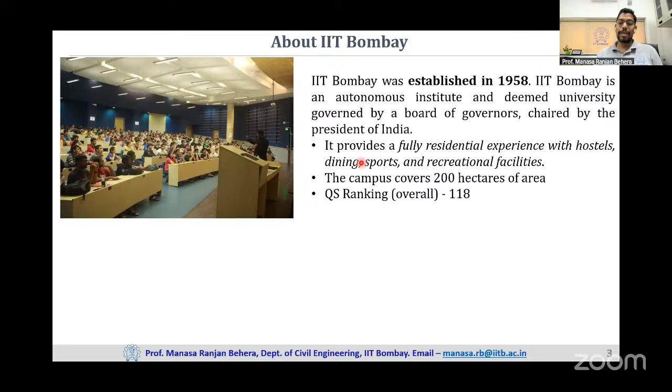First of all, I would welcome you all to IIT Bombay. Whenever you would like to come, we will be happy to host you. IIT Bombay was basically established in 1958, and the Department of Civil Engineering, where this specialization of ocean engineering is there, started along with the institute in 1958. We are actually doing well in terms of world ranking, QS ranking, and we also have various ranks at the country level as well as within the global scenario.

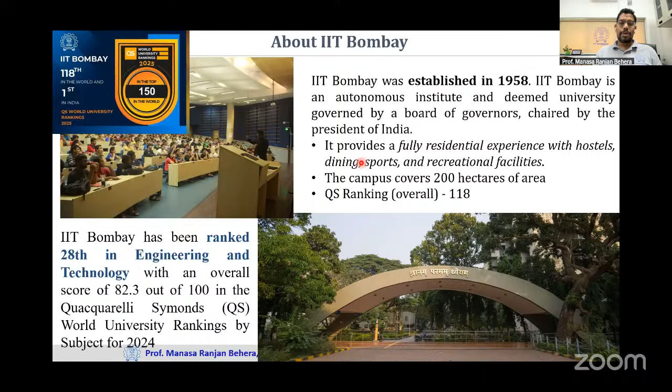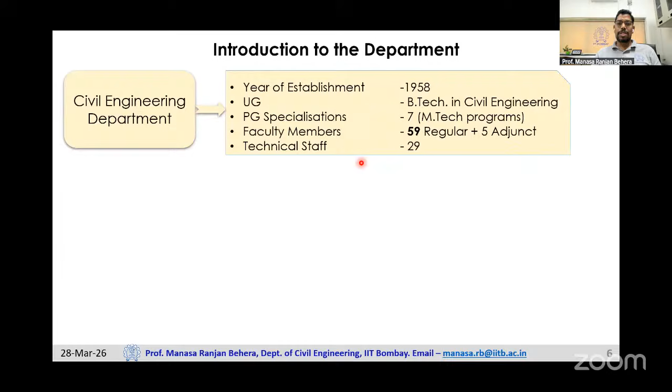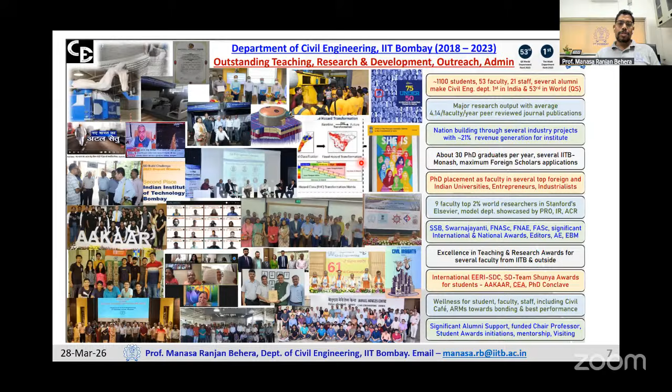This is again our department students, but coming to the department as a whole, we have almost 60 faculty members, and we have 7 specializations or verticals. I will quickly update on these verticals, not spending much time. Our faculty members have been involved in various national as well as international projects, and they have been recognized by various forums in the country as well as globally. The verticals are transportation engineering, geotechnical engineering, water resources engineering, structural engineering, ocean engineering, remote sensing, and construction technology and management.

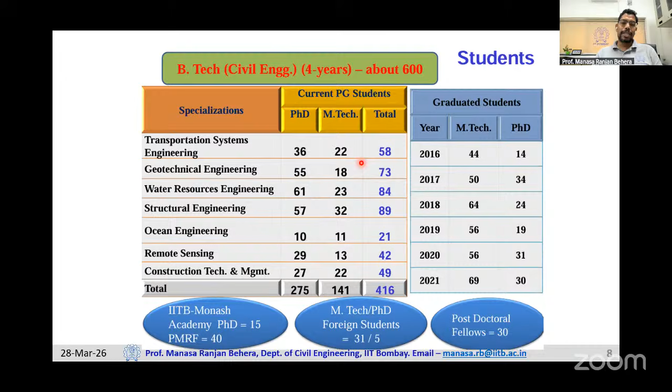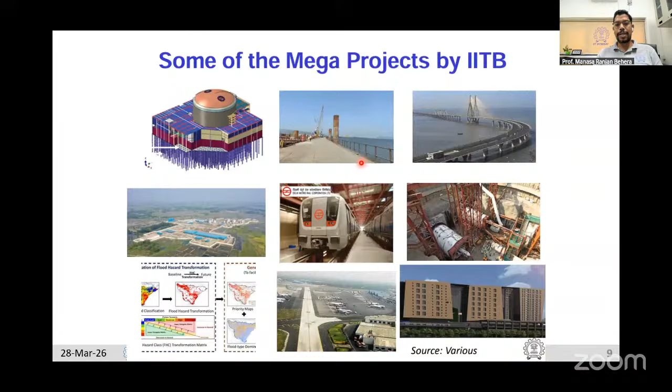Coming to the Ocean Engineering Group, let me introduce the faculty members who are part of this Ocean Engineering Group. We are 5 faculty members. Professor Balaji, who is currently on deputation as Director of NIOT, Ministry of Earth Sciences, is not present at IITB effectively, but he is always part of our colleague faculty, and he is expected back after completing his tenure.

Other than that, the 4 of us are currently here. We are contributing to all the research work and teaching that is happening, and the work that I'm going to present will be a compilation of many of us. However, before that, I would like to highlight some of the different work that we do at IIT Bombay.

In terms of coastal engineering, we do various physical and numerical modeling, coastal and offshore structures design, wave structure interaction studies, tidal hydrodynamics, computational ocean and coastal hydrodynamics, statistical and stochastic analysis, and neural network and soft computing works, which are applications to ocean engineering specialization, and modeling of tides, storms, and tsunamis. That is a major domain that I work in. We also look at impact of climate change, and wave, tide, and wind energy, which is another field where we have been working substantially.

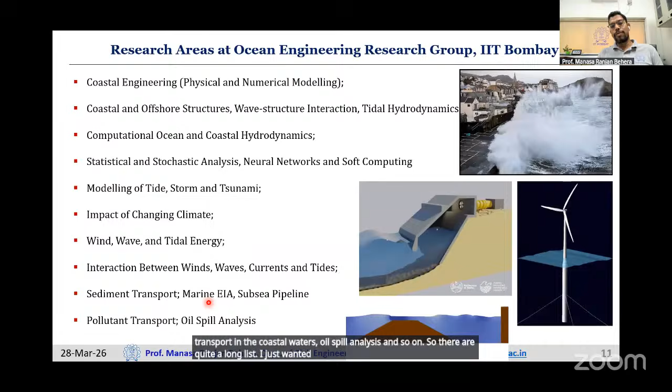So there's quite a long list; I just wanted to give a quick overview. Coming to the facilities that we have, we have a few facilities, unlike what you can possibly expect at IIT Madras, which has quite a large number of facilities in terms of experiments.

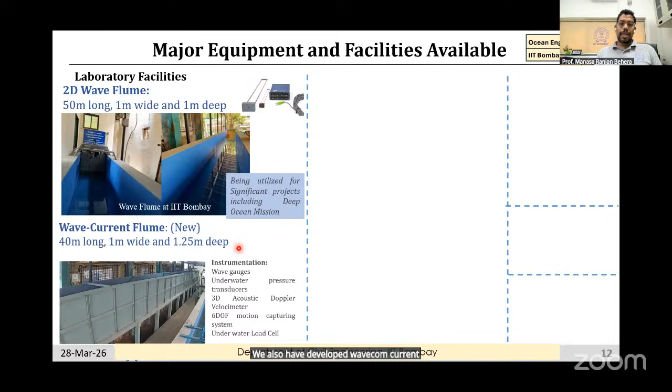We have a wave flume, that's a 2D wave flume. We have also developed a wave cum current flume. In addition, we have completely designed an in-house wave maker system, which is our own, and the copyright has already been obtained and it has been trademarked.

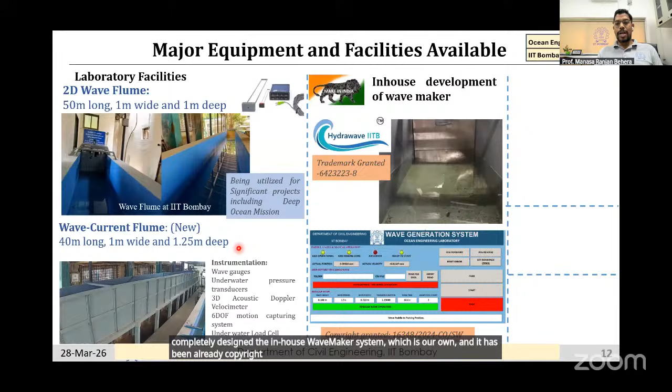In addition, we have recently installed and operated a towing carriage system, which is already working and being used. And to update all participants, we are in the process of developing a wave basin where we will be able to have a larger facility to generate long crested and short crested waves. In addition, we have computational clusters for various ocean modeling and ocean applications.

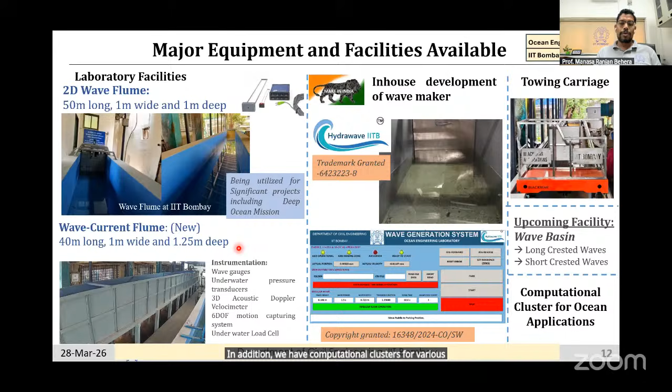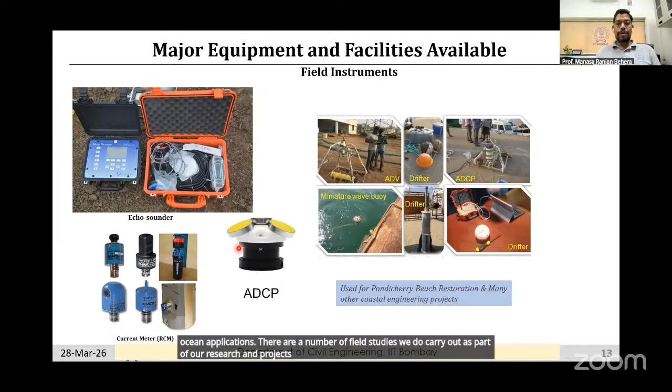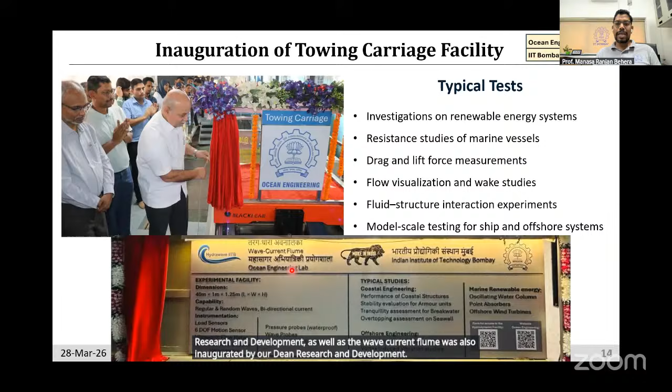There are a number of field studies we carry out as part of our research and projects, so we have several equipment to carry out field studies and field measurements. I want to highlight the recent towing carriage, which was inaugurated by our Dean Research and Development, as well as the wave current flume, which was also inaugurated by our Dean Research and Development. This has many capabilities that we will come to know as we discuss.

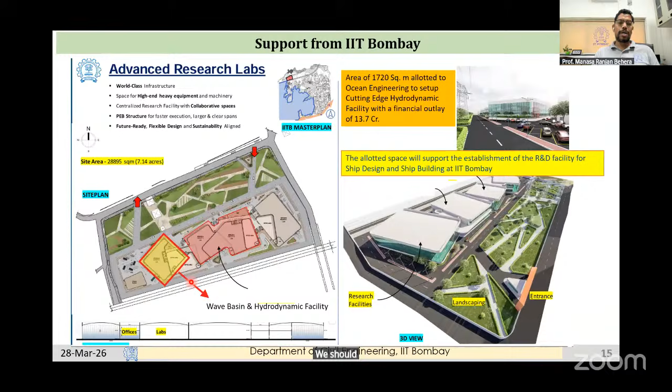As I was mentioning, we are planning to develop a wave basin where the land parcel has already been earmarked and the work is almost about to start. Possibly within a year, we should have this with us and in operation. This is the size of that wave tank and other facilities which are going to come up at that facility.

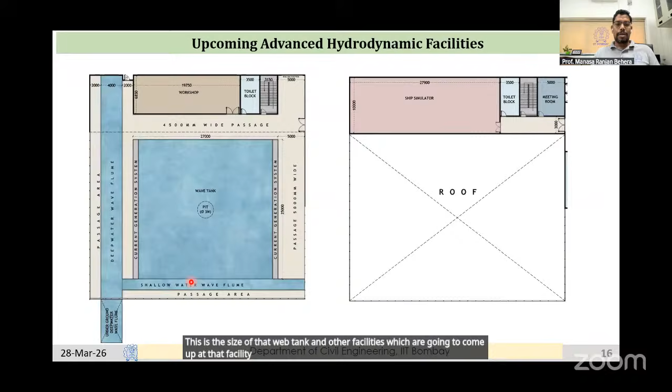Now I would like to highlight some of the research work that we are carrying out at IIT Bombay in different areas. This is on the marine renewable energy sector. We are carrying out studies on offshore wind energy, floating offshore wind turbines, oscillating water columns, OTEC platform analysis, then saline energy from salt water, and point absorber based studies as well. Some of this I will cover in detail today in the talk.

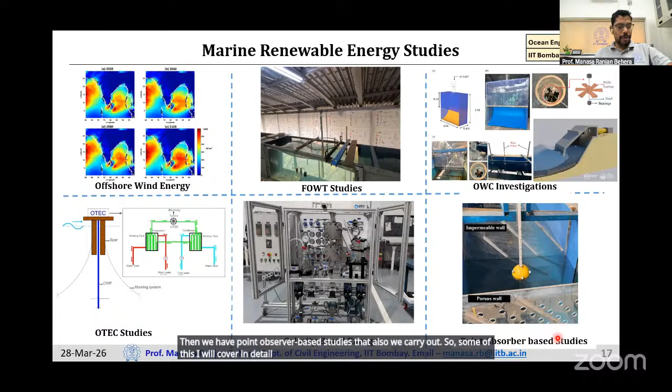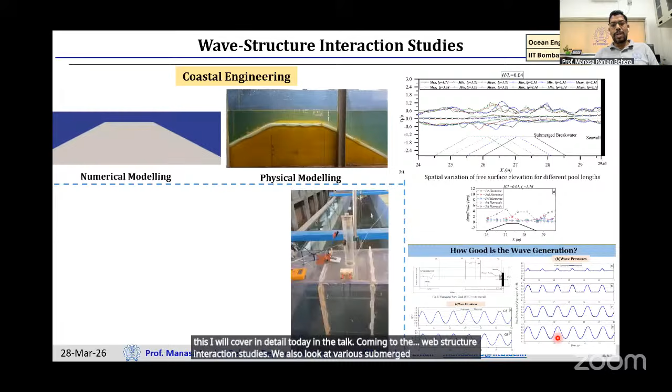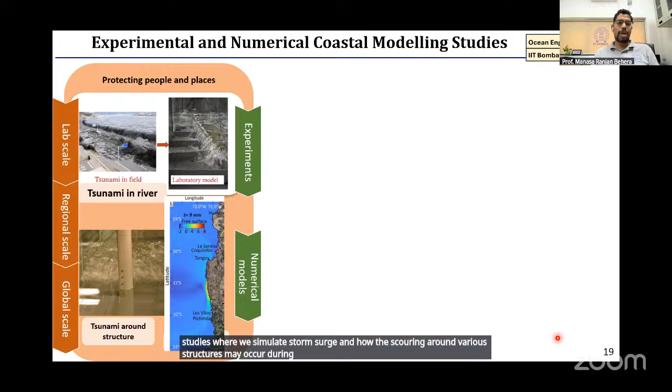Coming to the wave structure interaction studies, we also look at various submerged breakwaters, submerged reef analysis and how they work, and the oscillating water column, how that works. In addition, we carry out experimental and numerical coastal modeling studies where we simulate storm surge and how scouring around various structures may occur due to storm surge or tsunami kind of flows. And in addition, impact of vegetation or nature-based solutions is something we also investigate numerically as well as experimentally.

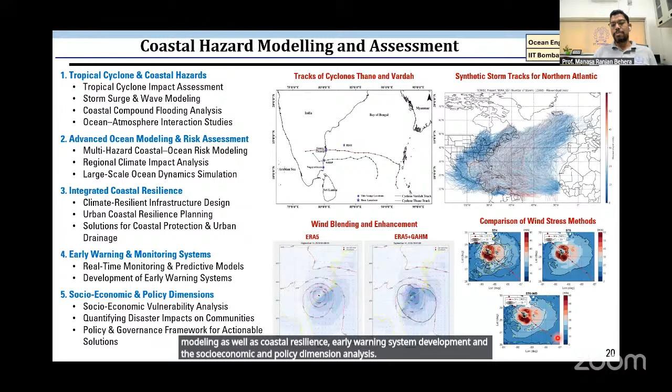Some other types of structures we carry out studies on are floating breakwater and wave energy device analysis in our laboratories. This is another area where we work in terms of assessing and modeling coastal hazards in terms of cyclone modeling, storm surge modeling, as well as tsunami modeling and flooding. We carry out work towards modeling as well as coastal resilience, early warning system development, and the socio-economic and policy dimension analysis of these disasters. This is again not going to stop at that.

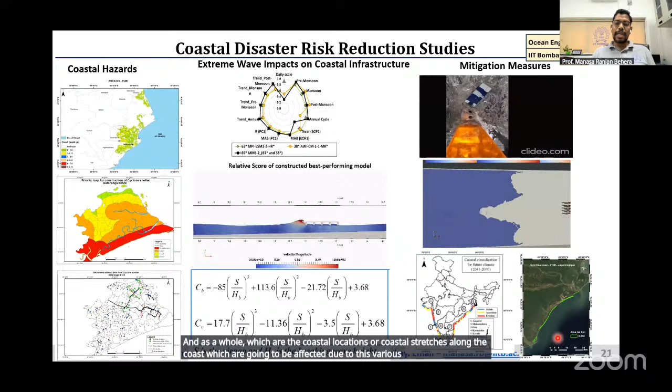We also look at various coastal disaster risk reduction analysis, how we can safeguard the public who are going to be affected, the structures which are getting affected, the design parameters which need to be considered for such structures, and as a whole, which coastal locations or stretches are going to be affected due to these coastal hazards as well as climate change impact.

Having said that, we have recently signed several MOUs with the government of Maharashtra to develop R&D infrastructure, to institute a center of excellence for the growing field of ship design and shipbuilding. We are also planning to offer a postgraduate diploma program for working professionals who can register for this course and complete it to enhance their profile as well as their knowledge.

This PGD program will be on coastal infrastructure and coastal ship design, ship repair facilities.

Now let me come to the technical talk.

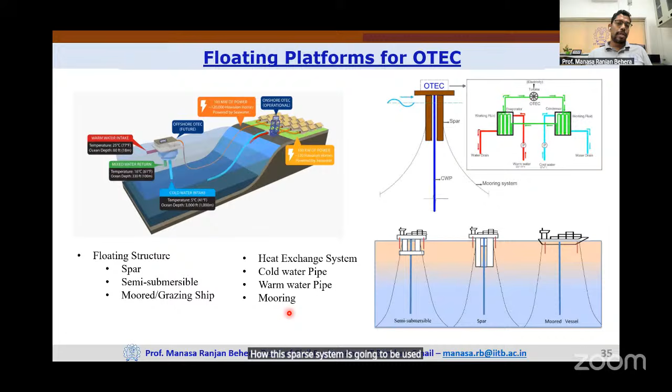Having explained that, we know there are many floating structures, starting from spar, semi-submersible, and vessels or ships. What are the processes involved? There's the heat exchange system, the cold water pipe is going to pull water, the warm water pipe is going to pull warm water, and then you will have mooring lines. All these have to be taken into account when we design and analyze this. So in our study, we have taken a spar, and looked at how this spar system can be applied for this OTEC system.

I'll not spend time on this, as these are already known to many of you, since you are all from naval architecture background.

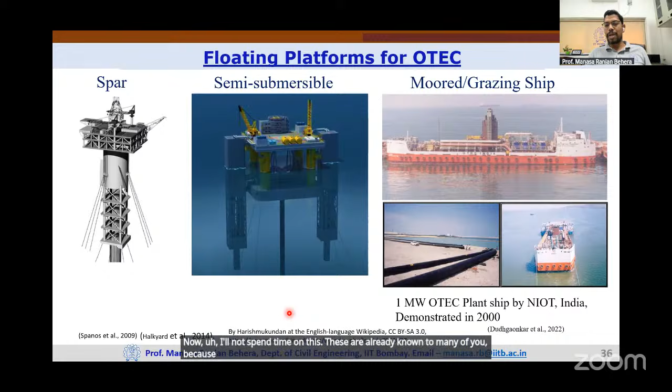Going forward, what we did first was look at all the tools that are available. Yes, we know we will carry out experiments, but we also wanted to do numerical studies. So we first checked what numerical tools are available that we can use. There were a number of tools available, and we could see that we may be able to use ANSYS AQWA for most of these studies we wanted to carry out, so we decided to go for that. We also looked at various studies which used these softwares, what were the limitations in their use, and what were the advantages.

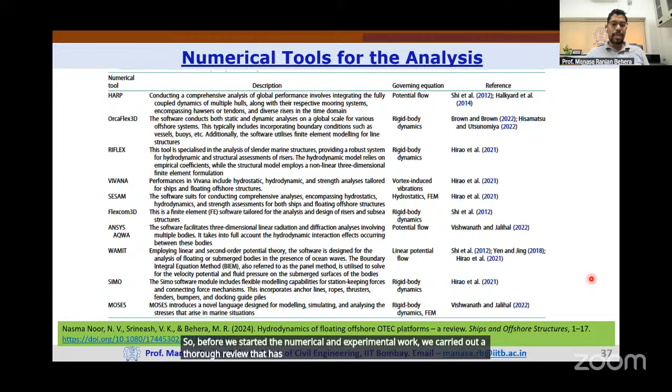More details on this can be found in the publication shown at the bottom, which is a detailed review of this work. So before we started the numerical and experimental work, we carried out a thorough review that has been published, so it can be accessed. Now moving to the overall analysis and design we wanted to carry out for this floating OTEC platform, we wanted to understand what the loads are.

There are several design loads. If you look at them, you have first of all structural loads, then extreme loads, then environmental loads and operational loads. When you talk about structural loads, it is quite simple to find out. You can have dead load, live load, thermal loads, and the weight of water that is going to be brought to the structure.

The VIV is actually a kind of hydrodynamic load, but we are putting it under this because of the cold water pipe. It is going to be acting on this overall structure, and as the water is being pulled or taken to the deck from the deeper water, there is a flow velocity. That velocity is going to have some additional inertia impact, and then you will have fatigue loads as well. So all that acting on the cold water pipe will also be acting on the overall structure. Then you will have the mooring load.

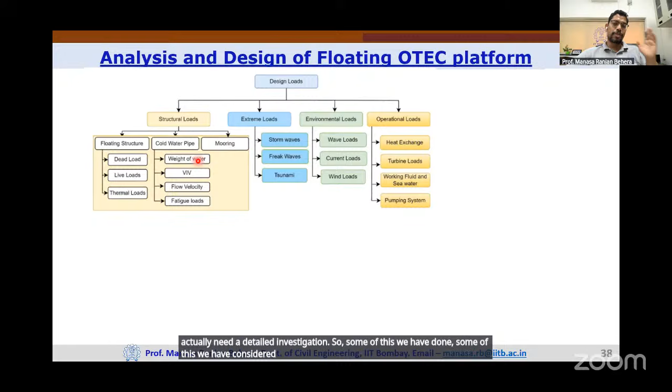So now, although it is very simple to write this, individually they actually need a detailed investigation. So some of this we have done, some of this we have considered based on previous work and previous structures, and we have progressed with our work.

Now, for extreme loads, one has to consider storm waves, freak waves, and tsunami. These are obviously expected in the ocean, so one has to really take into account the loads and impacts due to these extreme events.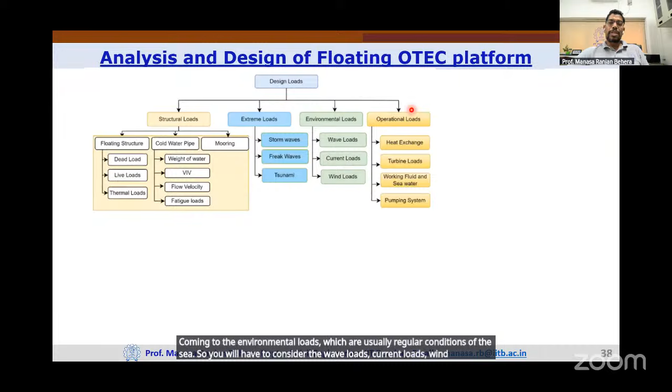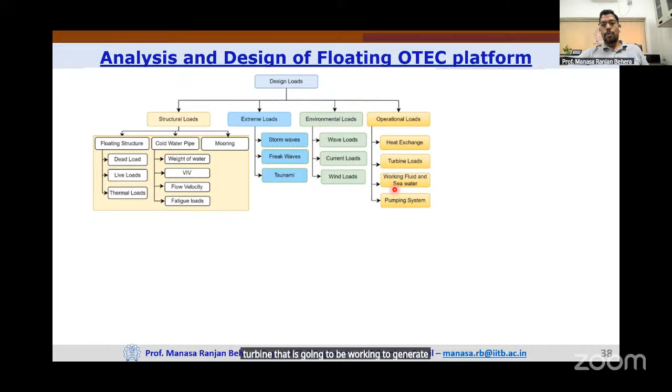Coming to environmental loads, which are usual regular conditions of the sea, you will have to consider wave loads, current loads, wind loads, and operational loads. These are basically the operation of the OTEC platform, that is the operation of the heat exchanger, turbine working to generate power, and the working fluid. Basically, some other fluid is used for vaporization and operation of the turbine, so that fluid is also going to play some role.

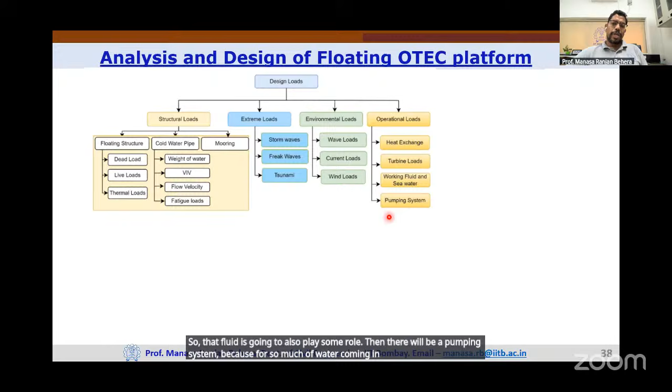Then there will be a pumping system, because for so much water coming in and out, we need a huge pumping system, and their operations are also going to affect the structure. So all these loads have to be considered when we carry out this study.

Now, what we need to do is carry out the offshore floating structure study. After incorporating all this, we'll have to do the response analysis, and then we'll finally decide whether it can be taken for energy applications or not.

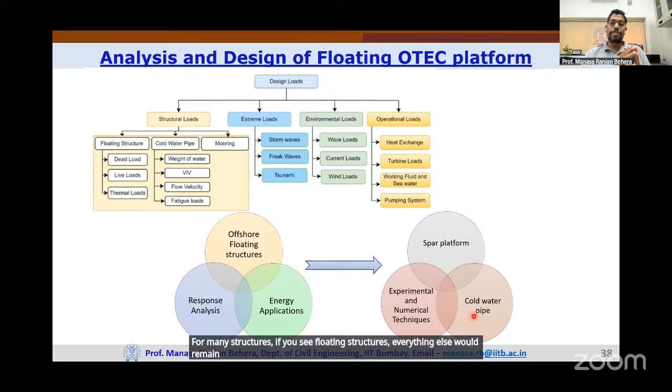Now, for the floating structure, we have considered the SPAR platform. For response analysis, we have carried out experimental and numerical studies. Finally, we also focused on the cold water pipe, because for many floating structures, everything else would remain the same except this cold water pipe and its dynamics. So that needs more focus and more study, which is what we have checked in our research.

So there are research gaps which we have listed here from this basic analysis. First, we need a comparison of spar, semi-submersible, and vessel as OTEC supporting structure—finally we ended up with spar. Then the effect of flow of the CWP on the response behavior has to be understood.

Then we need to carry out coupled numerical model studies to represent the reliable actual physical behavior of the structure, and optimization of the cold water pipe for energy efficiency. So what diameter of the pipe is going to be useful for extracting enough fluid and enough water, while ensuring it does not adversely affect the structural dynamics.

Then we have to look at the intricate interplay of the moon pool, which is going to take the cold water pipe and warm water pipe down, and the CWP as a whole, on the platform motions. Finally, overall, we will look at the behavior of different OTEC floating structures in various conditions—random waves, extreme environments, and so on.

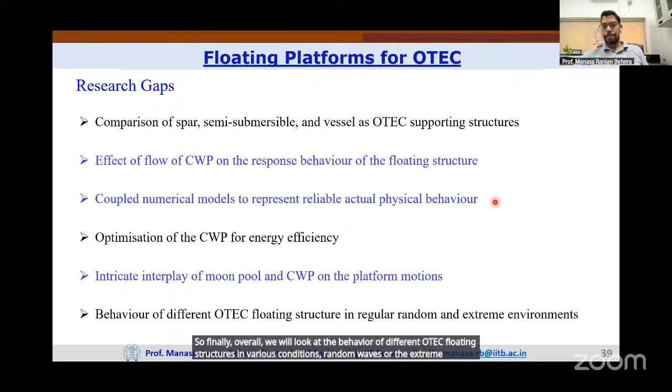Now, coming to the study, this is something I want to highlight in a nutshell. We actually fabricated the models. We did basic tests starting from the suspension test, bifilar test, and then we tested everything, making sure it was completely waterproof.

Again, just to highlight, this model you see here was actually fabricated in our lab. It's a 3D printed model, and the 3D printer is also in our lab, where it was printed in parts depending on the maximum printable dimensions, and then assembled. While assembling, we had to ensure it was completely proof against any leakage or water ingression inside, so that we could carry out the test properly.

And here you can see it is moving under the waves. This motion—yeah, that's okay. As you can see, there is an accelerometer attached at the top, which measures the motions, and there are other equipment attached inside which give us all the scenarios, and those results are going to be analyzed for further understanding.

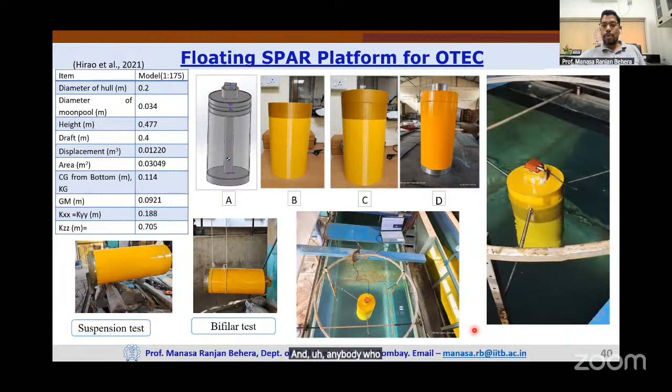There are research papers available, and based on that we have applied it and tested it, which worked well. Anybody who wants more details can contact us, and we will be able to help.

After we did the experiments, we also carried out numerical studies, and you can see the comparison of experiments and numerical studies. Both show quite good agreement with each other, although there are some differences which are bound to happen, and we know why these differences are there.

As I mentioned, the mooring system is not exactly replicated, and similarly there are other things which contribute to these differences.

We found that for various wave heights or significant wave heights, what will be our response or RAOs for different parameters - response RAO for surge, RAO for heave, and pitch - that were obtained.

Finally, these results, as you can see, we have communicated to a journal, and it is still under review. We have got one round of review, but we are waiting for the final outcome.

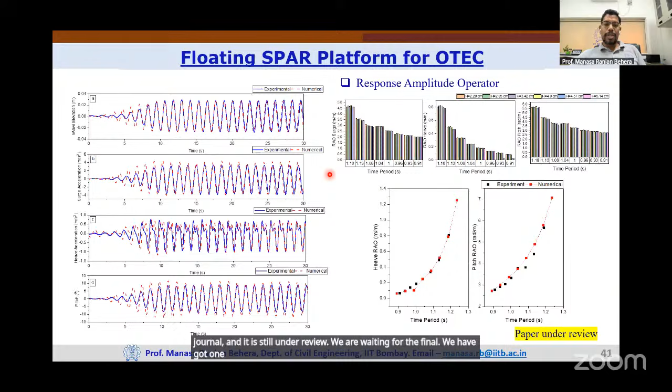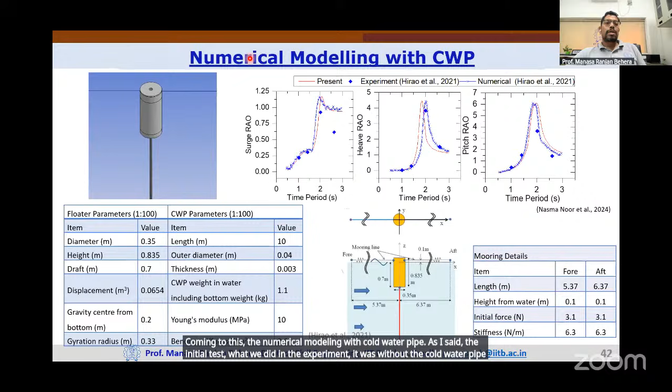Coming to this, the numerical modeling with cold water pipe. As I said, the initial test we did in the experiment was without the cold water pipe. Without the cold water pipe, the impact of the cold water pipe can completely change the dynamics.

To do that, our wave flume was not capable enough to accommodate the cold water pipe, because if the cold water pipe is too long, at 1000-meter depth, even when we scale down, it is still much higher than what we can accommodate in our wave flume.

So we started working on the numerical model. We could implement that, and we did the tests and compared our present results with all the experiments that were carried out in some studies, and we found they're really okay.

Further, during this period, we also found there is a possibility of doing the experiments. So what we did - for this total mass, we thought we could have some length of cold water pipe and then add some mass, and that can be simulated.

However, what we are missing out here is the flow dynamics, because the length, the flow and the vibration is going to be completely different when we have the complete length versus when we truncate it. Even though the mass part is reproduced, the flow part and the dynamics due to the flow are not completely reproduced in the experiment.

I will show you that towards the end, but I just wanted to highlight what challenges we are facing. So we did the numerical modeling, and with that we got results which are quite satisfactory.

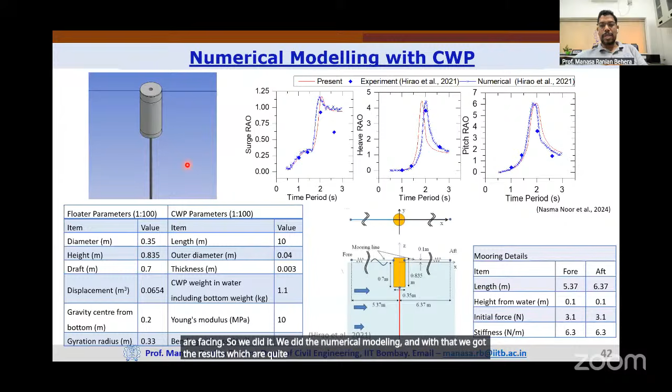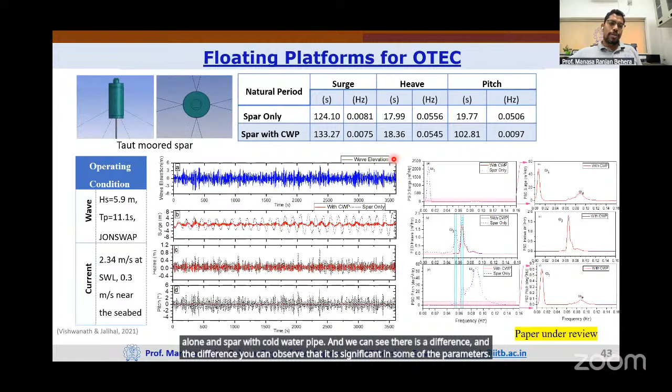The results also showed us how different parameters - surge, heave, and pitch - vary with spar alone versus spar with cold water pipe. We can see there is a difference, and the difference is significant in some of the parameters. I will show you in another plot.

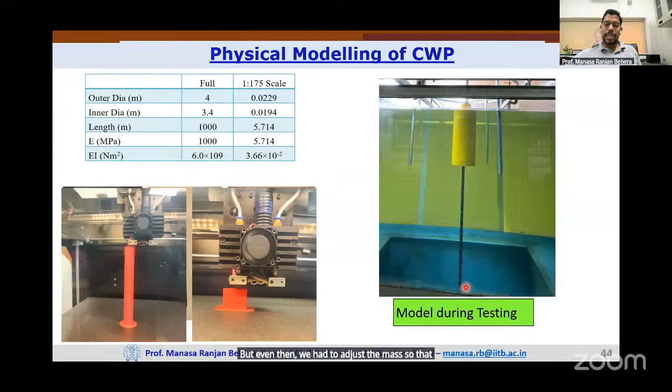This is the test setup with cold water pipe. We have a pit here, and within that pit, you can see the cold water pipe going down. But even then, we had to adjust the mass so it can be represented for the whole length.

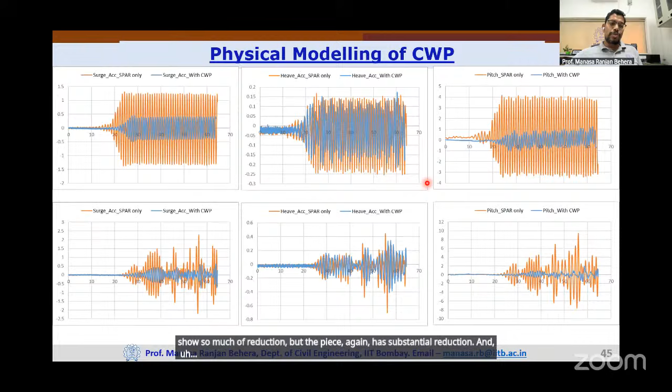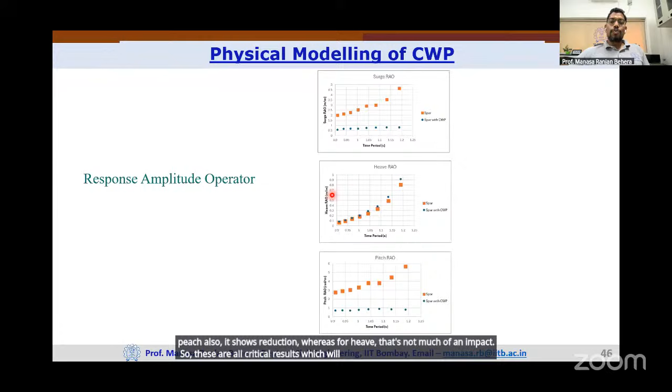When we plotted the RAOs, we can clearly see that the RAO for surge with cold water pipe shows substantial reduction in its motions, and for pitch also it shows reduction, whereas for heave that's not much of an impact. These are all critical results which will help us fine-tune various design parameters of the structure.

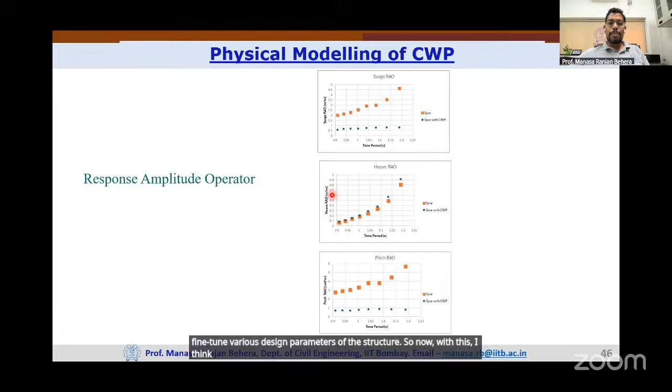So now with this, I think I will move on to the next topic I want to talk about quickly, that is floating offshore wind turbine. So far what we discussed is the floating OTEC platform. Now I am going to talk about floating offshore wind turbine.

This is something we started working on a few years before. One of our students, Arya, who was working has completed almost all the work and will be submitting her thesis very soon. I'm actually presenting her work. The previous work was of another student, Nasma, who also worked on that.

So this floating offshore wind turbine, our aim was to fine tune it for the Indian context. As we know, two regions have been identified and looked at to develop and install offshore wind turbines: one is Gujarat, another is Tamil Nadu.

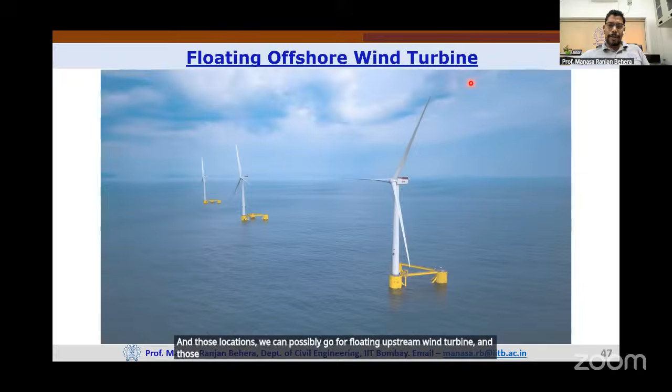These two locations are potential regions for offshore wind turbines. Now, off Gujarat, the depth is available at certain locations, and similarly off Tamil Nadu also at some locations we have substantial depth. Those locations we can possibly go for floating offshore wind turbine, and those studies are essential.

So what we did, we looked at this analysis, and first we took a model called OC3 SPAR platform to support this wind turbine. The OC3 SPAR platform is already kind of available, an established platform which has been studied enough. First we wanted to carry out the experimental investigation of the dynamic characteristics of this platform under the influence of aerodynamic loading.

That is the additional component here. The OC3 platform is there, the SPAR which is present, but it has not been used for the wind turbine. If we want to use such a platform for a wind turbine, we need to account for the aerodynamic loading, the thrust, the vibrations, and the dynamics that come due to the movement of the turbines, the loading on the wind turbine, and its impact on the hydrodynamic stability and so on. For this, we carried out the tests or experiments using this methodology.

I will not get into the steps of this, possibly these are all standard process, but we carried out the tests for regular wave conditions with rotor thrust and irregular wave conditions with rotor thrust, and all that we analyzed and understood, what are the various motion responses that are coming because of this.

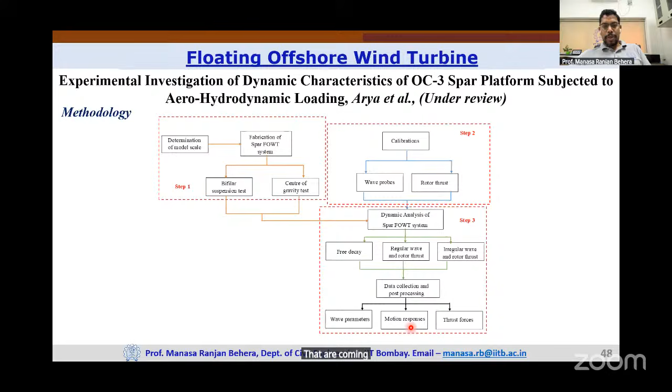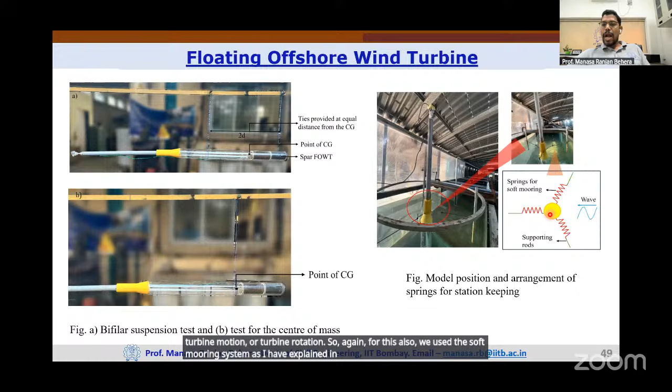So for that, you can see here the experiments which were carried out, the motions of this structure, and if you look carefully you can also see the movement of the turbine. The fan is rotating, which will also give thrust to the overall structure. How this motion and behavior of the spar is happening was studied, and what actions we can take to reduce the motions or stabilize it, and which can be implementable. That's the objective of this study.

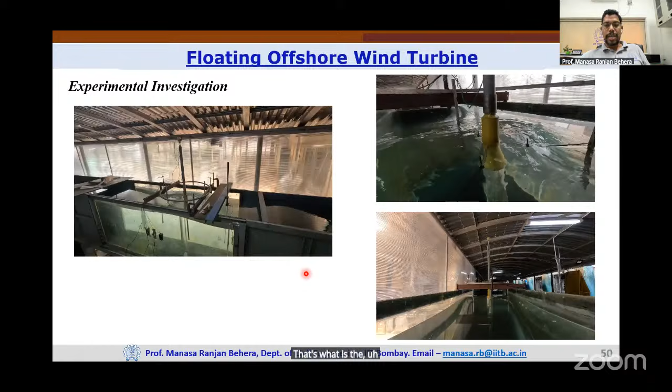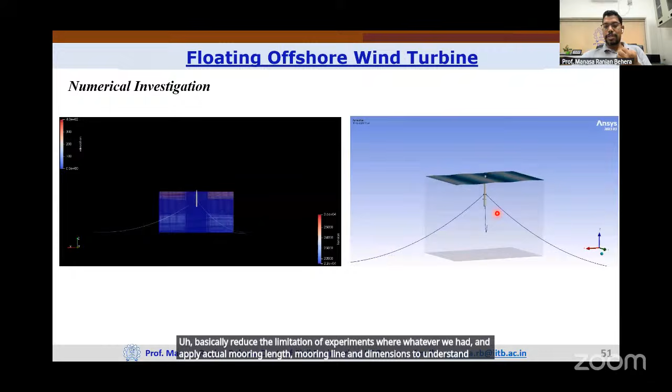So that's the advantage of numerical modeling, which is basically a limitation in terms of experiment. Initially we did the experiment and got initial results that were satisfactory. Then we went on to reduce the limitation of experiments, whatever we had, and apply actual mooring length, mooring line, and dimensions to understand the structural dynamics.

Having done that, we also carried out the study for the coupled wind wave simulation and LCOE analysis. So first we did the coupled wind wave simulation, to understand when there is wind, there is rotor thrust and there is movement, how this is happening. And LCOE is basically the levelized cost of energy.

That analysis is also very important, because if we do not have the cost for unit energy, and that cost is not viable or affordable, then this structure or the turbine is not going to come up, because no investor is going to come forward. So we did that analysis as well.

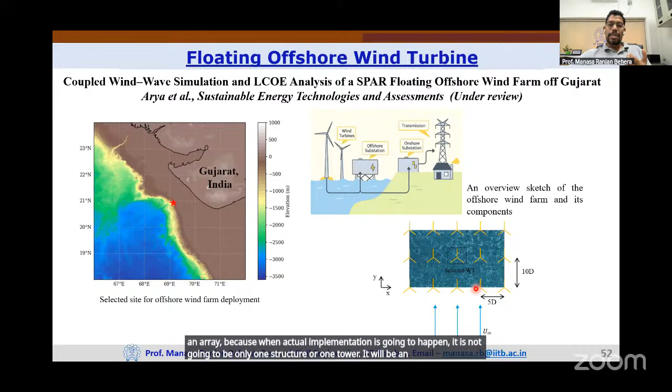In this, what we did, we considered an array, because when actual implementation is going to happen, it is not going to be only one structure or one tower. It will be an array of devices, so you will have number of wind turbines installed in some kind of pattern. That pattern is also optimizable, depending on the wind and the energy efficiency and so on.

Let us not get into that. What we have done is some broad consideration: we have considered 10 diameter, 10 times the d of the rotor diameter. So if you have the diameter of the turbine as d, then the distance between one turbine to the next turbine is 10d, and similarly in the lateral direction we have considered 5d.

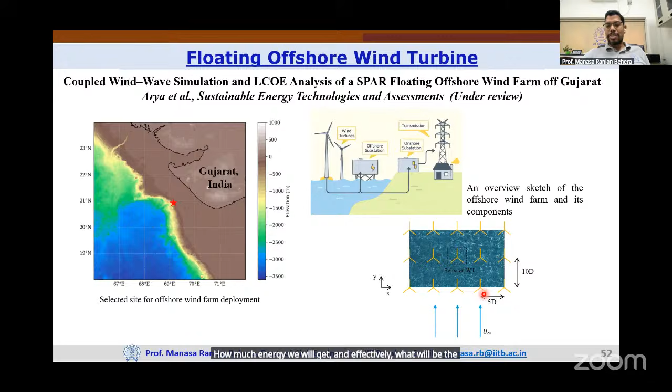Using this specification, we have considered an array, and that has been used to calculate how much energy we will get and effectively what will be the overall levelized cost. Based on that, there are two different methods which we found, and we took both methods to find out what value we could obtain. One is by Maienza, and one is Diaz and Soares, and both these methods we have adopted and checked.

Using that, finally we could see that the levelized cost is coming to something around 9 rupees or so per unit, per kilowatt hour. So that is slightly higher compared to what is the energy cost right now.

But it is good for me to talk at this point of time when we are having difficulty in getting oil and gas, and the news is going haywire, telling that gas is not going to be available, oil is not going to be available, and so on. It is also important for us to see what are the alternatives. So this is what is the alternative. Even though the cost is slightly higher, that might still become equal if this scarcity is going to come up. Now, the question is, let us not accept that this problem will persist.

Even then, if we actually scale it up and increase the number of towers and facilities, there are also studies going on to invest in hybrid energy extraction systems. So it's not only wind. Wherever the wind is high, it is known that the waves are also possibly going to be higher. So if the waves are higher, we can also have wind and wave energy combined, or some locations there could be wind and tide energy together. In case of Gujarat, that also is possible. So we will have to explore what kind of combination of energy we can actually harvest.

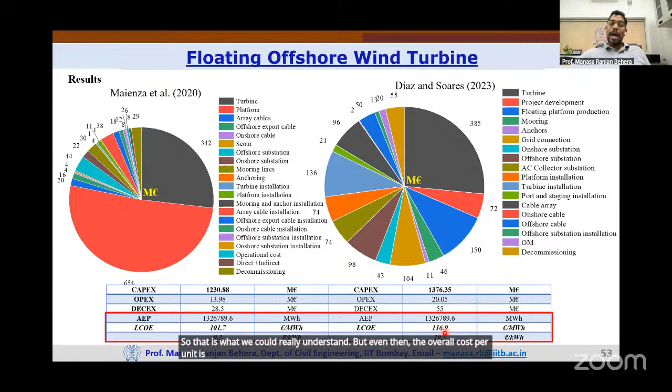So together it might become more cost effective. That is what we could really understand. But even then, the overall cost per unit is still in the acceptable range.

Now, as I said, we have two locations which have been earmarked or identified as potential regions: Gujarat and Tamil Nadu. There are locations along Tamil Nadu and Gujarat where the water depth is very shallow, and in such regions it is possible to go for fixed structures instead of floating. Whenever the depth is higher, in order to reduce the capital cost, we need to go for floating structures, because you cannot go for fixed structure for a very large depth. So for fixed structure, we are also again working, but I'm not going to present the work on that.

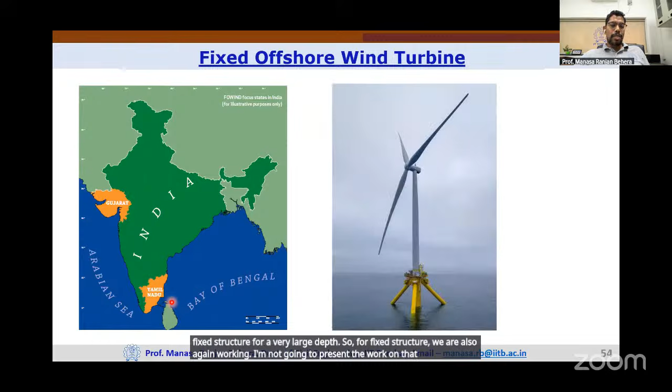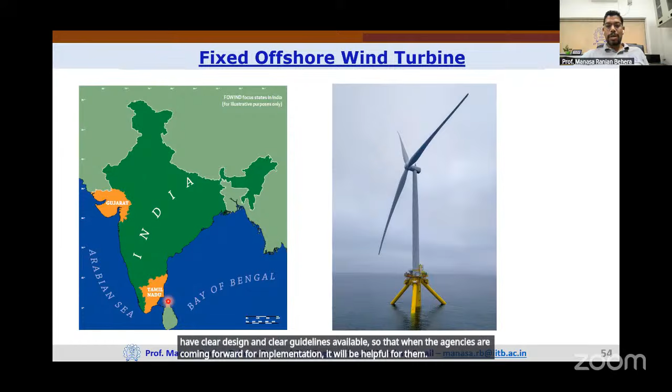There are certain aspects which we want to look at considering the Indian context and investigate, and then make sure that we have clear design and clear guidelines available, so that when the agencies are coming forward for implementation, it will be helpful for them. So that study is going on, and we are carrying out. Another PhD has started working on that.

Now, when I have been talking about these two aspects, these are all offshore installations. Any offshore installation, we have to really check the survival condition. Especially when you have extreme events like cyclones and storms, these facilities are not going to be removed and kept somewhere else. They will be there. So when you know that it will be there, they have to survive.

So that survival condition needs to be checked. So for that, what is the procedure? Procedure is, first of all, we have to understand what are the historical cyclone records or tsunami records, whatever has happened earlier. We need to assimilate that. Once we have that, I'm presenting for a cyclone case, let us say. So for the cyclone, we can get the records from our e-atlas from IMD and get the data. There are also other options like JTWC and other records can be obtained.

From that, one can calculate the probable maximum tropical cyclone parameters. What are these parameters? These are nothing but the maximum wind speed during the cyclone and maximum radius of the cyclone. So basically it gives us the intensity and the size of the cyclone. This probable maximum is a statistical calculation which needs to be carried out, and I'm not going to go through that because it will take a lot of time. I'll also show you some papers from where one can actually get it. We have already published it.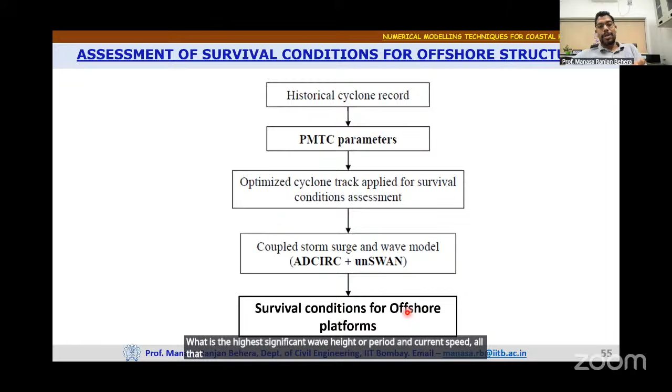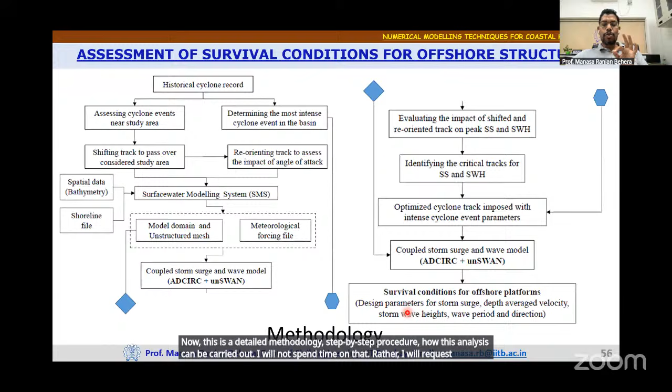And the final output will give us the value that we have to use for survival condition of this offshore platform - what is the highest significant wave height, period, and current speed - all that we will be able to obtain. Now, this is a detailed methodology, step-by-step procedure how this analysis can be carried out. I will not spend time on that. Rather, I will request you please go through our papers so that you will get the detailed methodology.

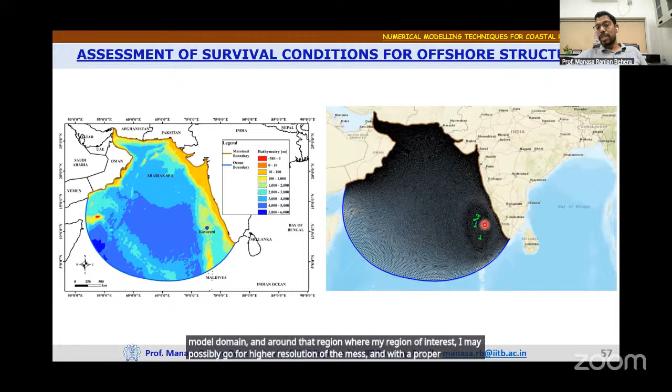Now, this typical domain I am showing here is for the Arabian Sea. You can see here, this completely captures the Arabian Sea domain. And here, let us say I have some installation in this island where we have Kavaratti in Lakshadweep, and I want to study that. Then what I will do is first discretize this model domain, and around that region where my region of interest is, I may go for higher resolution of the mesh with a proper fine resolution discretization to get a better result. So these things have to be done.

We have done it, and then we considered some of the cyclones that have happened earlier. So some cyclones that we could identify were considered. But the first thing we think is that if the cyclone passes through that site, then we will get maximum load.

So that one has to carry out, possibly if we don't know. Then after doing that, we understood that we are not getting the maximum surge at the site if the cyclone is passing through directly, because the cyclone is always anticlockwise and the maximum velocity is at the distance of R max, wherever that is. So if we move the cyclone slightly off and simulate it, the maximum radius and maximum velocity might hit this location, and that is where the maximum surge may take place.

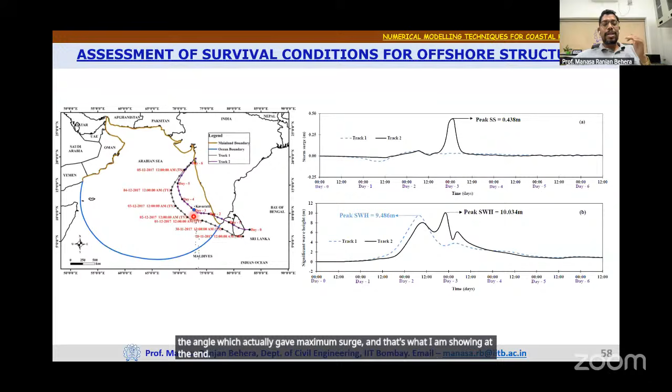So that analysis, that sensitivity study, was done first. Once that is done, you can calculate your parameters - peak storm surge and peak significant wave height. One thing I haven't shown here is that before doing this, we took this track and tried different angles. This is the angle which gave maximum surge, and that's what I'm showing at the end, but different ranges of angles also had to be studied.

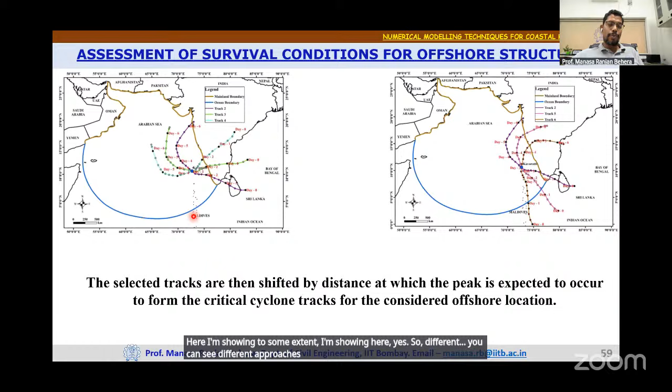Here I'm showing, to some extent, different approaches that have been studied, and whichever gave maximum surge has been finally considered. The final values are shown here - the peak surge, peak significant wave height, and peak period - all obtained. These are the parameters used for analysis of the structure, or stability analysis, so that even during these conditions the structure remains stable and intact.

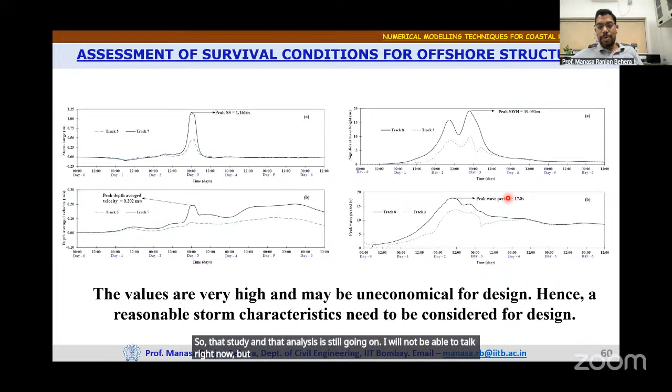So there are discussions on whether we should really go for such extreme conditions, or have something like a middle ground, because designing for extremes impacts the cost and overall design of the structure. Can we really go for this? That study and analysis is still going on. I won't be able to talk about it right now, but I can discuss it at a later stage.

So anyway, I've already discussed these things. This is again, instead of Arabian Sea, carried out for Bay of Bengal. So for both sites, similar studies have been done, and we obtained some values.

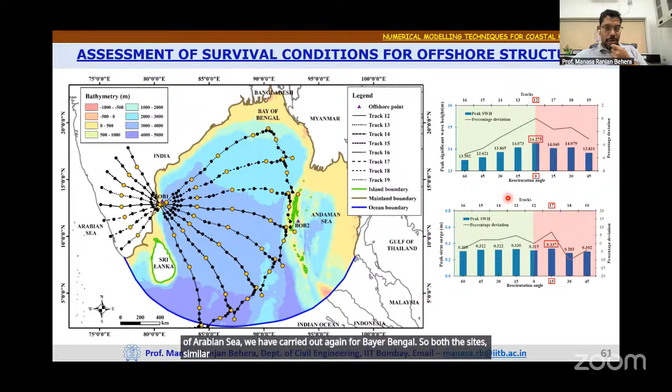Now I'll highlight another study quickly - I'll take maximum 5 minutes more. This is another study which is very important with respect to the offshore environment. When we use winds for any analysis, especially for future predictions, we are most likely using climate model outputs. There are several climate models available - GCMs, RCMs - all of them give output. Now, which output is good, which is bad?

There are hypotheses which say you take all the models, average them out, or take an ensemble, and it will give you very good results. Now my question is, if I have some models which are very bad for this site or region, and I use that in the averaging, it will actually degrade my results rather than improving them. How can I say it will improve? No - if I take models which are doing fairly good for this region, it will give me a better output. So that's what we tried to analyze.

Instead of taking all these models and just taking an ensemble of 50, 30, or 10 models randomly, we should have some basis for that. So what we did was consider different variable scales. We know the wind data should be good in terms of daily mean. The annual cycle should be represented properly. Annual mean should be there. Seasonal mean should be captured. Annual mean trend should be captured. So there are different things we could really look at.

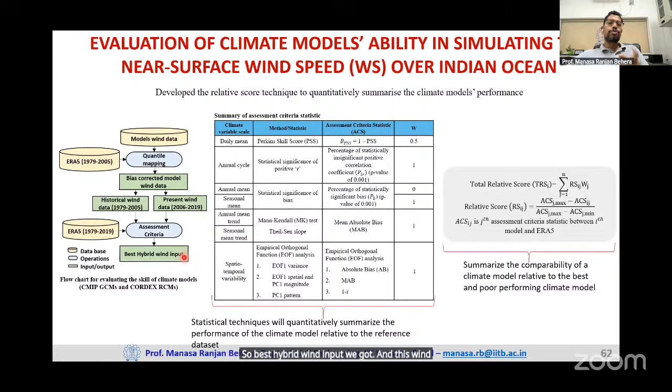We have historical data from 1979 to 2005, and we consider it as the present wind for 2006 to 2019. With that, first we find out the assessment criteria. Once we got this assessment criteria, we used it for future winds. So the best hybrid wind input we got, and this wind data set we will use for our future wind studies.

We could find that this analysis was carried out for CMIP5. Right now we have CMIP6 data, but initially when we started, we got CMIP5 GCMs and CORDEX RCMs. All that analysis we carried out, and we found that there are several models which are really doing good. There are two publications listed here which will give you full details of this methodology, how to calculate the TRS, and how to carry out this kind of study.

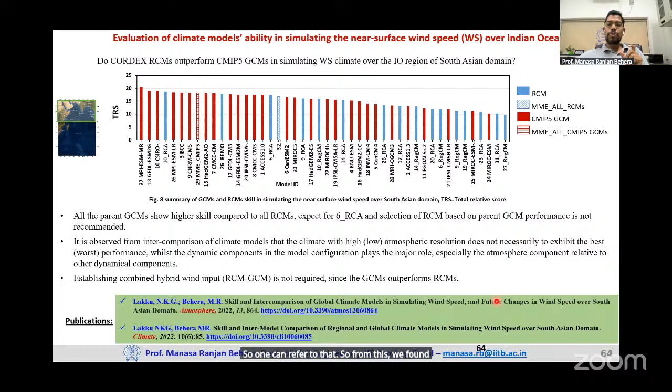So one can refer to that. From this, we found which are the models to be taken. Now, quickly moving on, we also carried out the comparison between CMIP6 and CMIP5, and finally we summarized that most of the CMIP6 GCMs show significant improvement over CMIP5. This is expected, since CMIP6 is the advanced version, so we could also see that.

But in that, we found that there are certain models, let's say the first few models, which are really doing good. And if we take the ensemble of these, that might be better. So we did it, and finally we concluded that there are a few models, which you can see listed here, that are really good for the wind data.

Here I want to put a disclaimer that this exercise which has been shown here is done for wind data. If somebody is going to use any other data, they have to carry out a similar exercise for that data set and use that appropriate model output, because different variables might be better predicted by different models. So we need to understand that.

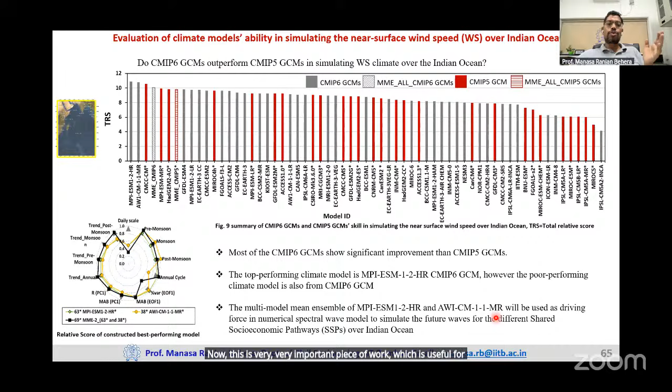Now, this is a very important piece of work, which is useful for all offshore wind analysis and wind inputs that we are going to use.

So overall, to summarize the presentation, we could see that there are studies which have been carried out. However, more studies are required for ocean renewable energy support structures for the Indian scenario, which we are carrying out to some extent, but many more studies are required, and other institutions are also working on it. Considering the cold water pipe in the Spar OTEC platform is very critical and needs to be thoroughly investigated, we have started it, but much more study and analysis is necessary.

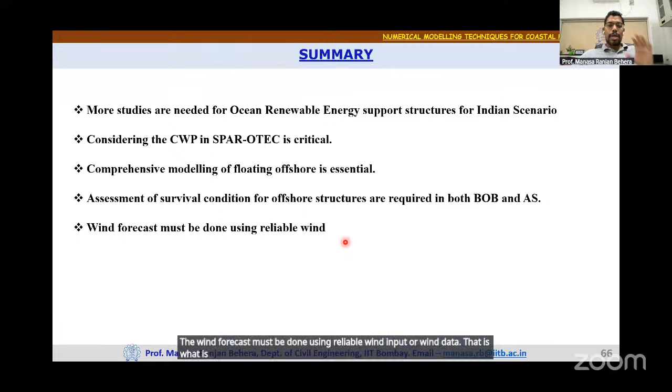Comprehensive modeling of floating offshore platforms is essential. Assessment of survival conditions for offshore structures is required for both the Bay of Bengal and Arabian Sea domains. The wind forecast must be done using reliable wind input or wind data. That is the overall summary I can give from the presentation that I did.